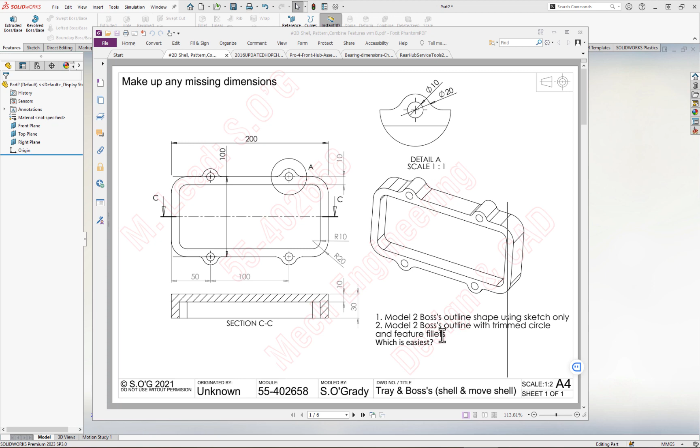external bosses. For 2 of them we're going to stay just inside the sketch - model the boss outline shape using sketch only, then use an extrude command or extrude feature to create them in 3D. Then for the other 2 we're going to model the outline with a trimmed circle and add some fillets in as features. The question is which is easiest or which is quickest possibly.

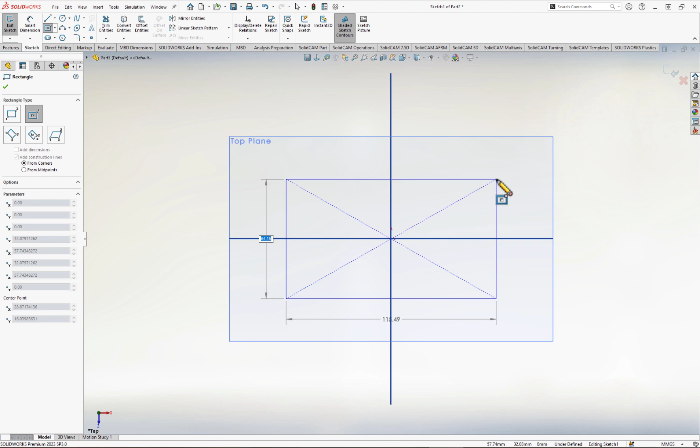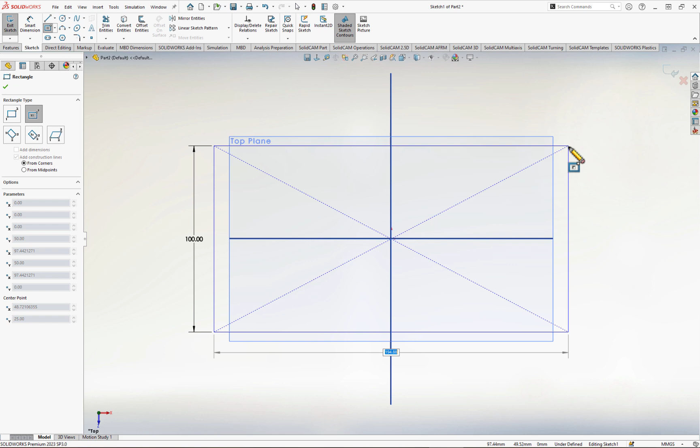So the first thing we're going to do is just create a simple box shape. I'm going to sketch on the top plane using the center point rectangle. In this case, do we have a height? I don't think there's actually a height for the box listed on the tutorial, but it does say at the bottom of the sheet any dimensions you can't see listed, just make them up so your model appears roughly the same. So I'm going to set the height to 100 because that seems about the right scale, and the length on the PDF is actually listed.

So I've got a rough box shape there, so I'm just going to extrude that using the extrude feature. I have an overall height of 30 listed, so we can accept that.

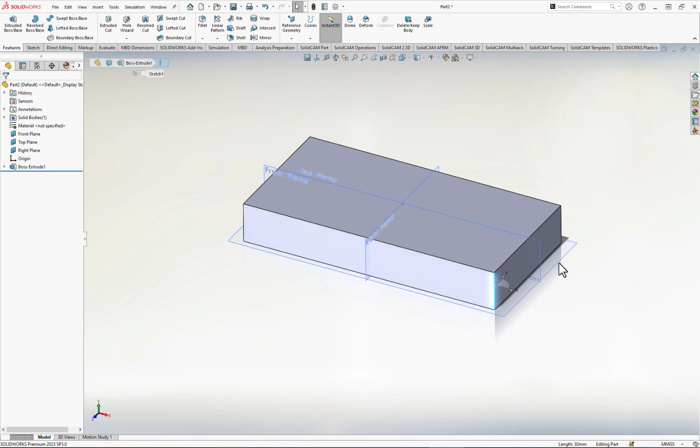And then I'm going to put some fillet features on the outside edges, the vertical edges. These fillets on the drawing are 20mm, so I'll change that to 20mm, and then select the other edges. Notice you can pick the edges through the part itself, so that's quite useful - it saves you having to rotate the part too many times to actually view the edge you want.

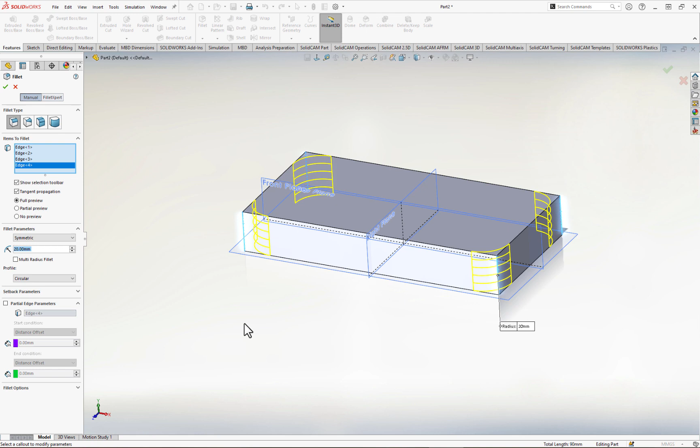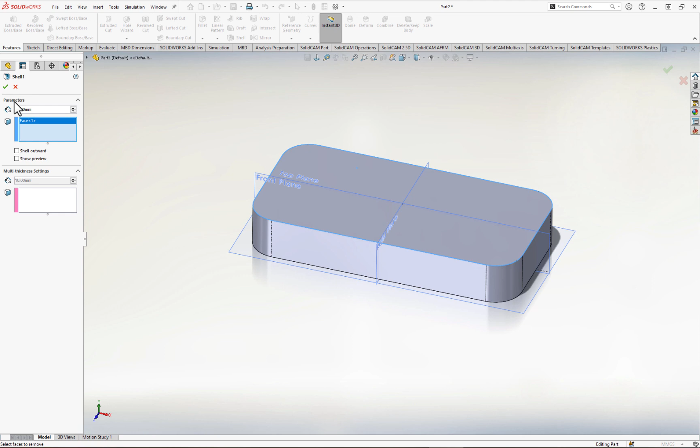So that's the 20mm fillets put on. This box has a wall thickness of 10mm, so I can conveniently use the shell command and set the wall thickness - the default wall thickness is 10mm, so that's quite useful. Then I just have to click on any of the faces I want to get rid of - in our case it's this top face - and if I want a preview of that I can switch preview on. It seems about right, but it's as easy really just to click the green tick and see what the effect of that is.

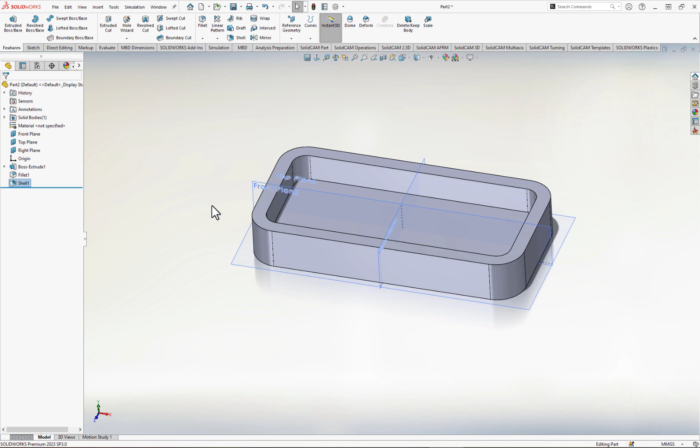So that's the basic box shape. Now let's come to creating those little protrusions, those little bosses. I'm going to sketch on this top face, and what I'm going to do is - let's have a little think.

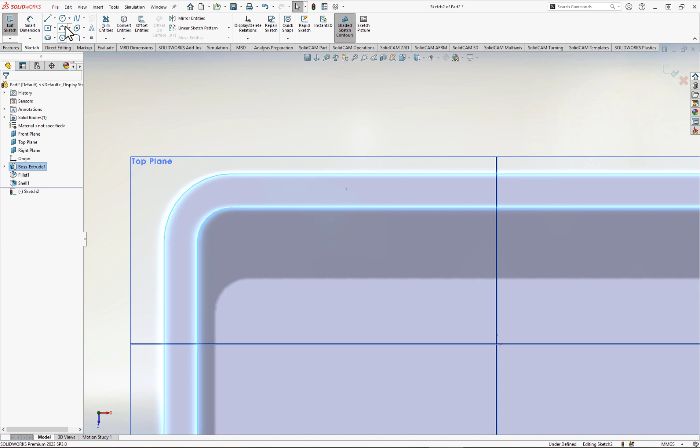Let's use the 3-point arc tool. If you haven't got the 3-point arc tool visible, you can click on the drop down and make it visible. I'm just going to manually sketch some arcs that are approximately the shapes I require - something like this. Then I'm going to use some relations to actually lock those into place. So 3 arcs approximately like that.

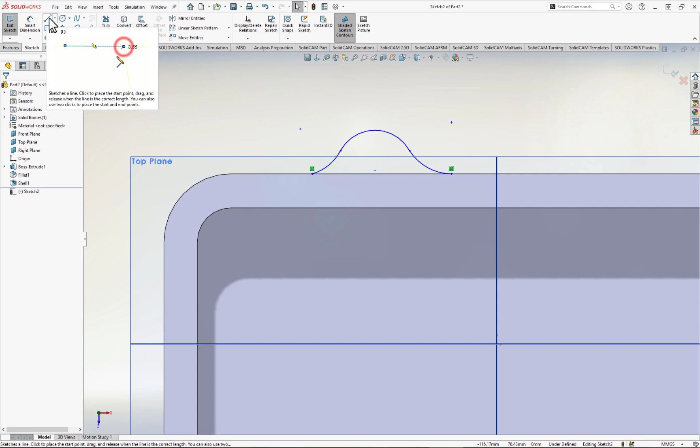Then I want to create some solid geometry when I eventually use this sketch to create a feature. So I'm going to have to create a closed boundary by putting a straight line between the 2 lower edges there, and then I'm going to put some tangent relations between the ends of these arcs. I'll click on this arc first, then hold down Control and click on this one, make those 2 tangent to each other, then do the same thing with this arc and this one - make those 2 tangent to each other, so they run into each other nice and smoothly. That's essentially the non-technical way of describing what tangency is.

And then I also want to make this arc tangent to this box edge - same thing there. And then I want to make this arc... now I've accidentally selected the exact midpoint of that arc, so I'm just going to click in some empty space to deselect that - that isn't what I want. I just want to click on the arc itself, not its midpoint.

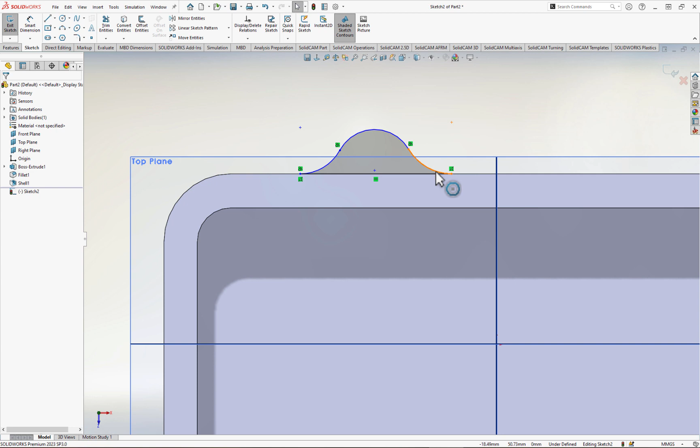So click on the arc, hold down Control, click on the edge of the box, tangent. So those are all the relations that I want there.

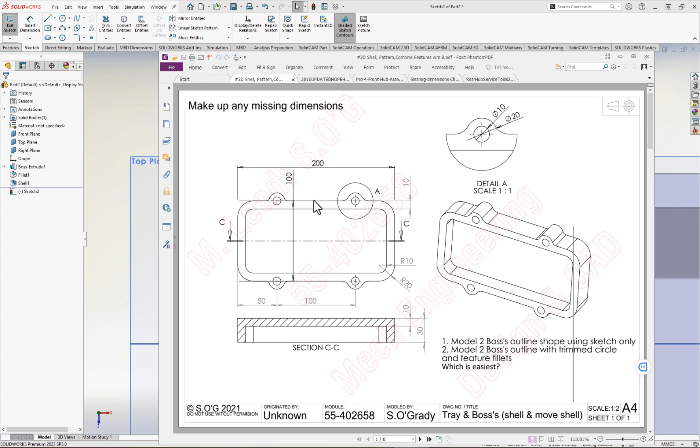What I'm also going to do is, looking at the drawing, if I bring the drawing back slightly, it appears as if what's implied here is the center point of these holes is coincident with that horizontal edge of the box. So I'm going to put that in as a relation. I can just click and drag the center point of this middle arc and let it lock itself onto the edge of the box like that, and it should put that coincident relation between the center point and the edge of the box.

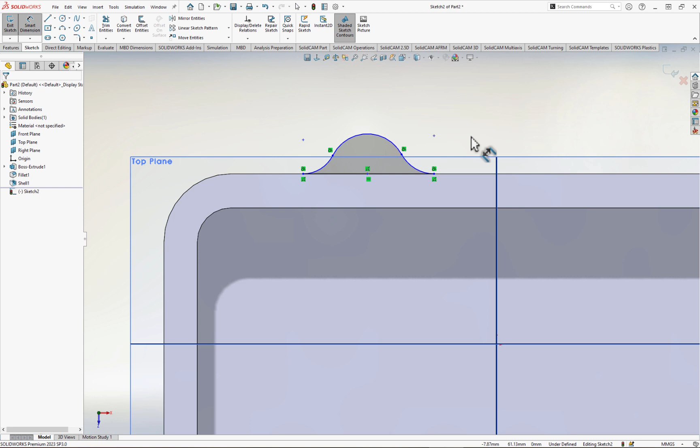So that's okay. I'll put some smart dimensions on these bosses now. So what have we got? We've got a 20mm radius for this, I believe. So let's put that on. It may pull and stretch my sketch out of shape, but no, it seems okay.

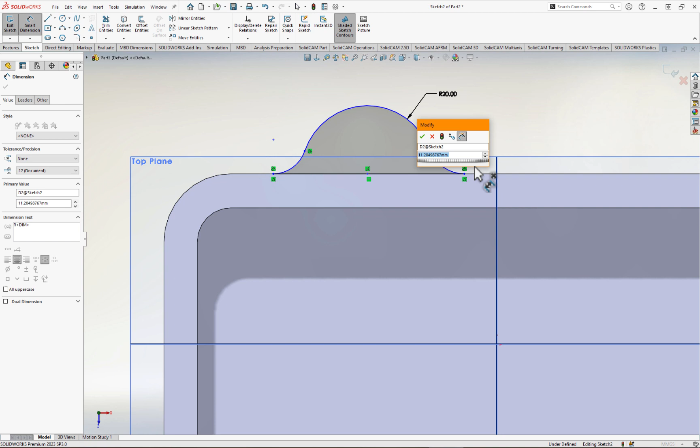And what are the fillets? I'm not sure the fillets are actually listed, so let's estimate what these fillets are likely to be. I suspect they're equal in size to this dimension, so let's see if that works. Yeah, that seems to work.

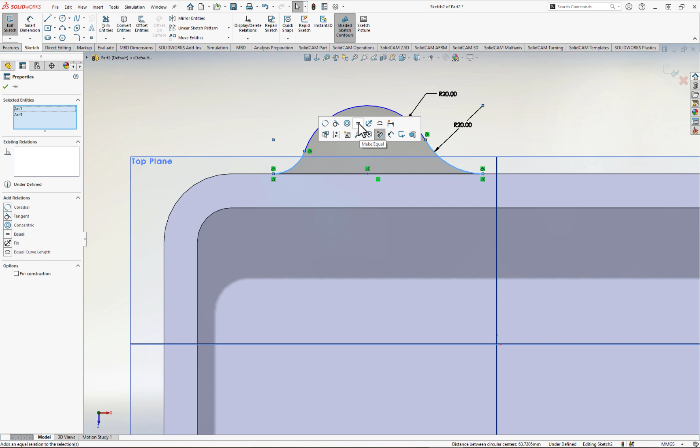And I'm only going to put that 20mm on one of these curves, because then I'm going to click on that curve, hold down Control, click on that curve, and tell the system I want to make them equal in size. So I only have to worry about modifying one dimension if I want to come back in and change these.

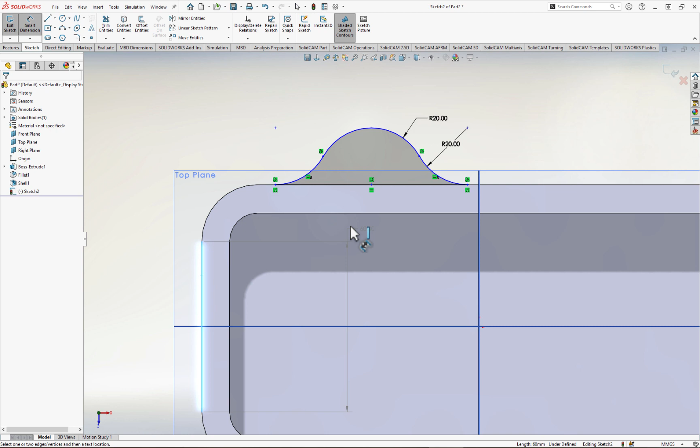So how are these positioned horizontally? I believe they're 50mm in from this edge to that center point, like that. So 50mm in. Now that doesn't look right.

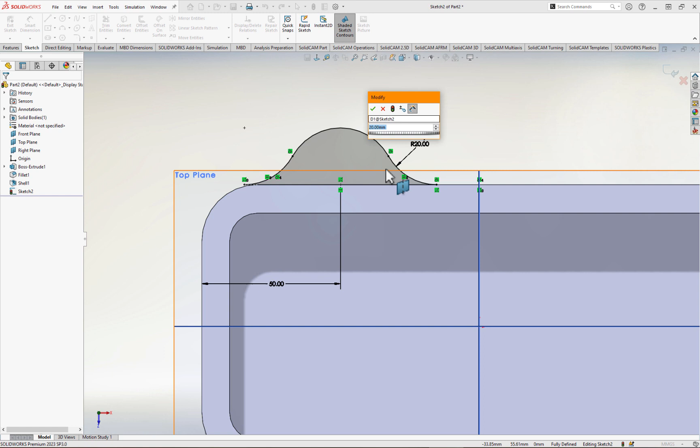That's because I've put the radius twice as big as it should be, because on the drawing it's listed as a diameter. So clearly that radius should be 10, and so should that one as well. 10. Yeah, that looks more like the drawing.

So that's my kind of rough shape that I want to add onto this box. That's the shape of the little lug or little boss that protrudes out. Now obviously I have more work to do because it has a hole cut through the center, but I'm going to do that as a separate feature.

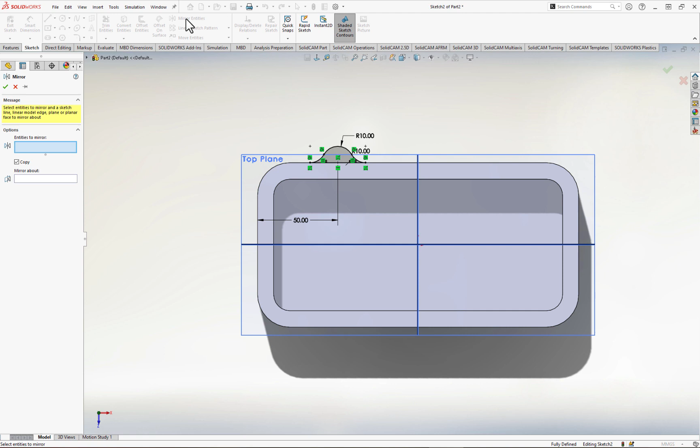So what I can do is use the mirror command within this sketch and just drag a selection rectangle over everything I've just sketched. It all shows up in that box. Go down to this mirror about box and activate it by clicking, then mirror about that plane there, and accept that. So I get a mirrored copy over here.

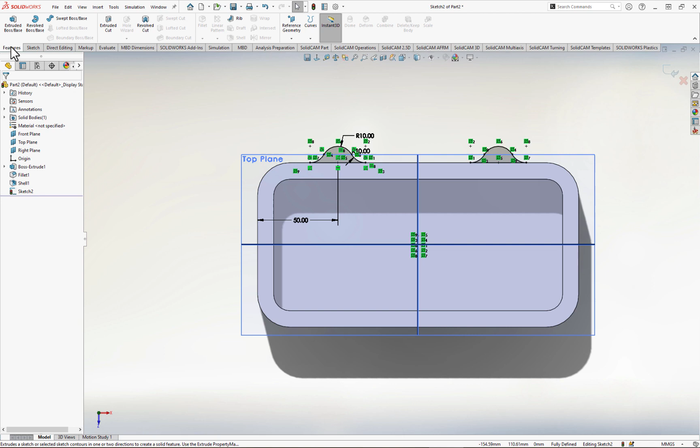And then with these two closed boundaries, I'm going to go into features and tell the system I want to use these closed boundaries to create an extruded boss. It's going in the wrong direction currently, so I'm going to flip the direction there.

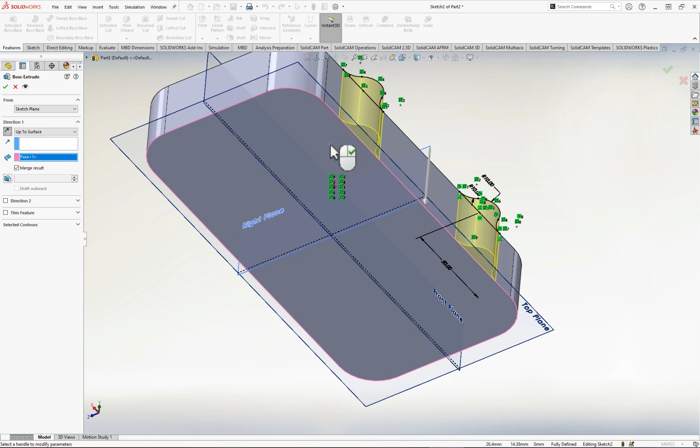30mm happens to be the correct depth or extrude value, but it's probably safer to switch that from being a blind value to up to surface, and then we can just click on the bottom surface of the box itself. That way, if the height of the box changes in the future, these bosses will follow that change. I won't have to come in and edit another value - these bosses will just extrude however deep the box is. So that seems a bit more sensible.

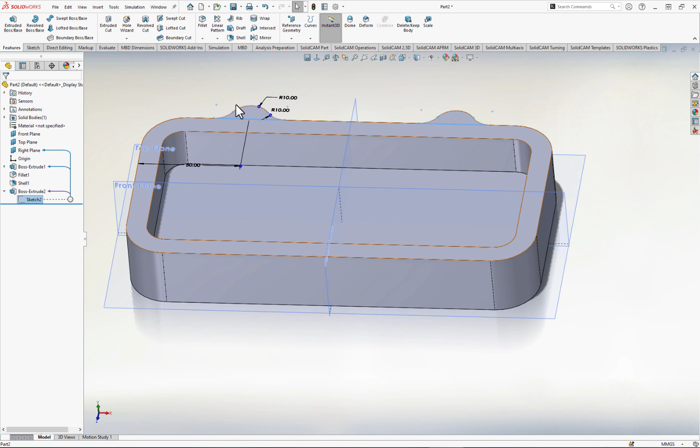So that was the first method on the PDF, where we sketched the shape in its entirety that we required adding on to the side face of the box. We did use a slight labour saving tool there because we used the mirror command once we'd sketched it over here, so we didn't have to sketch it a second time. But it was a little bit long-winded, setting up those arcs and putting the tangencies in there.

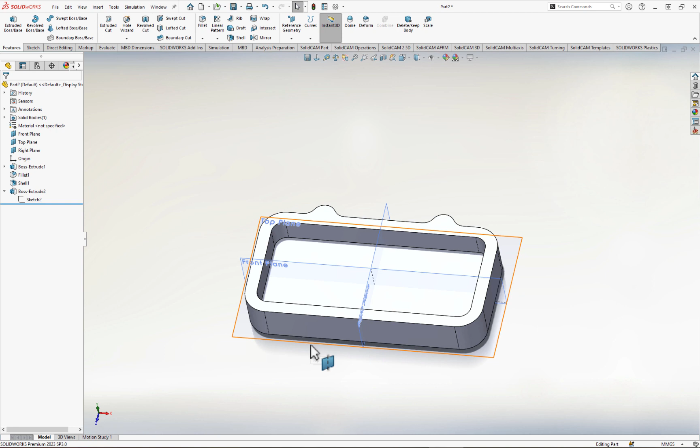So let's look at a slightly different way of achieving exactly the same thing. I'm going to begin the same, sketching on this top face. But this time, all I'm going to do is get my circular sketch tool and sketch a circle that has its center point attached to the side of the box there. Then I'm going to set the diameter of that circle to whatever I need it to be.

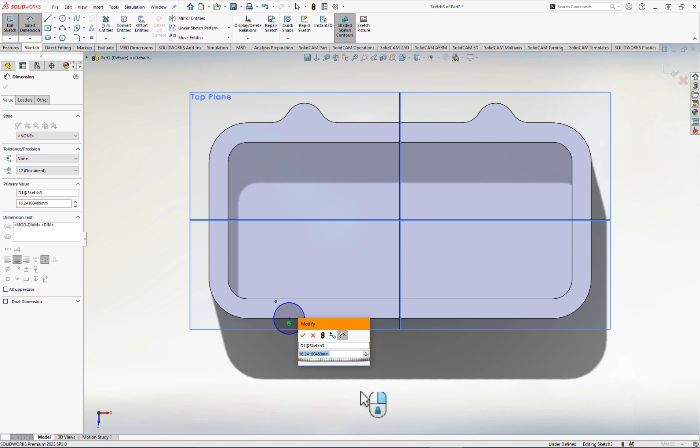So if you remember, the diameter should be 20, the radius obviously is 10. And then get my smart dimension and just say from there to the center of the circle should be 50.

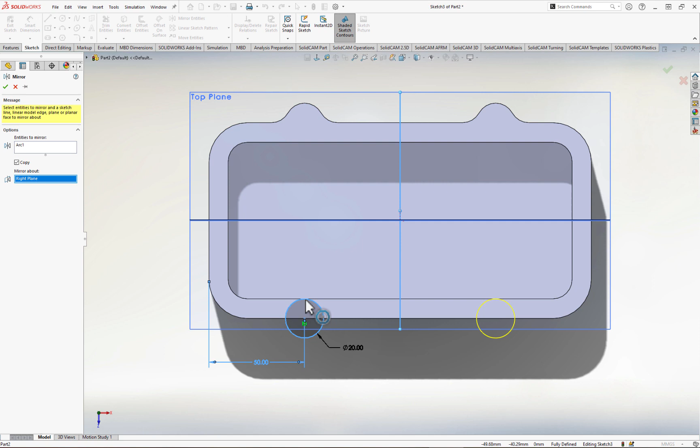I'm going to use the mirror command again, selecting the entirety of that circle, mirroring about that plane. This may or may not work. The reason I'm calling attention to this is that the edge of that circle is coincident with that flat face on the inside of the box, and sometimes the system doesn't like that. But we'll progress, and we can always come back and fix that if need be.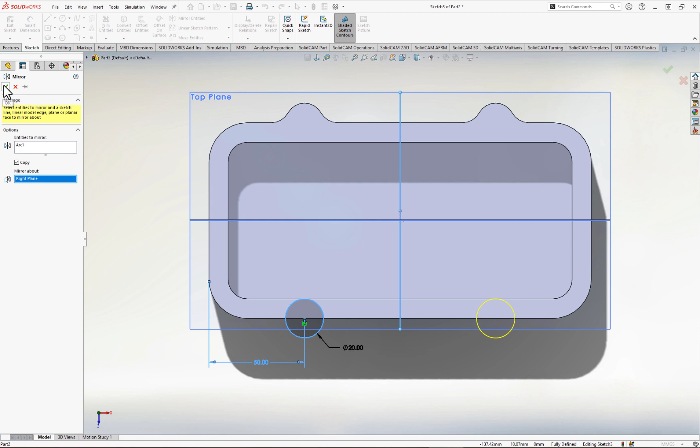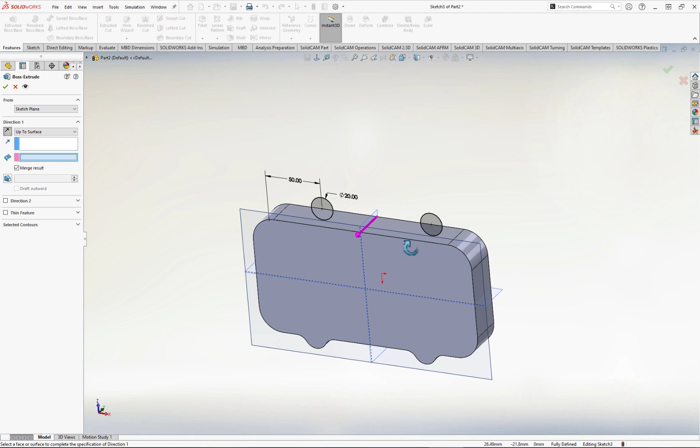We can put a straight line in there and use the trim command. But let's see—okay, extruded boss/base. This setting I set previously, up to surface, is still set here, so it's just waiting for me to click on a surface. I'm going to click on... I picked the front plane by accident there, it's an easy thing to do. Yeah, so I've picked that bottom surface of the box, accept that feature.

Everything seems okay. Those circles aren't protruding through onto this inside face of the box, so that's fine.

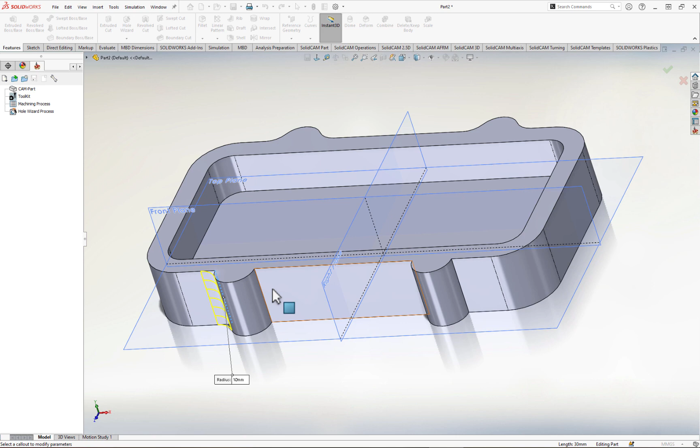That's not quite finished, because what I would do now is use the fillet command. There's the fillet command, but it's far easier and quicker, rather than going to the top of the screen and opening that command, to just click on an edge you want to apply a fillet to, and the fillet command pops up there. So let's apply our fillets. These were 10 millimeters, and I can just click on any edges I want to apply that 10 millimeter fillet to.

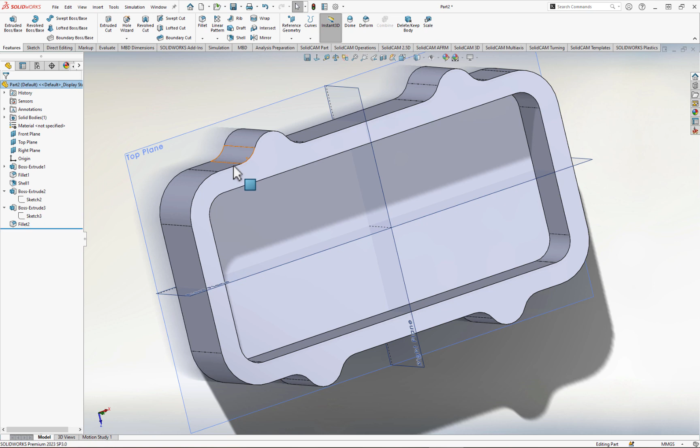My system seems to have jumped into another menu there. So yeah, two alternative methods of achieving broadly the same thing, or exactly the same thing there. If I had to give advice, I'd say broadly I prefer the second method. For any fillet features, all things being equal, it tends to be more wise to apply fillet features using the fillet tool. That's not always the case, but more often than not it's advisable to apply fillets to a part using the fillet tool rather than any sketch tools. So try to strip out the fillets when creating your sketches, and add them in after you've created a feature from that sketch using the fillet tool. That's the broad advice—it doesn't always hold true, but more often than not.

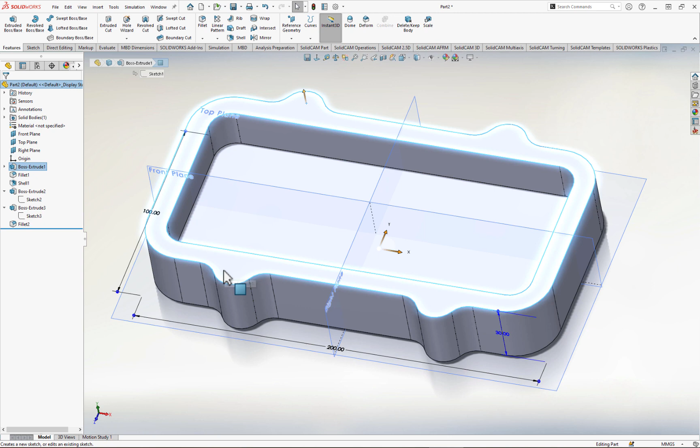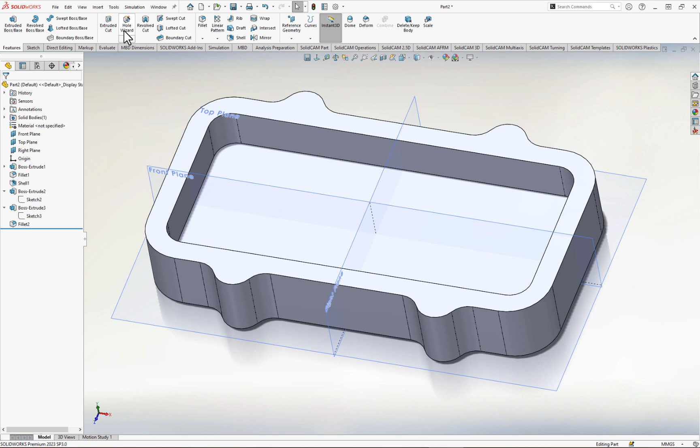So let's put these hole features in. We could quite easily sketch on this top face, sketch 4 circles where we need them, and use an extrude cut to cut that material away. Or we could use the hole wizard tool. Given that these are plain holes, just kind of simple drilled holes possibly, there's not a huge amount of advantage to using the hole wizard tool. So let's just do a simple extruded cut.

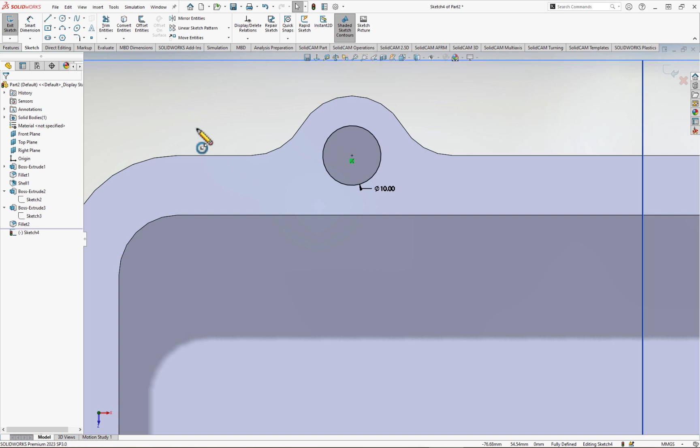So I'm going to get my circle tool. I'm going to hover over that edge until the center point appears, because I want to lock this circle onto the center point that's already there. I'm just glancing over to see what diameter these should be—10 mil—and then if I press escape, yeah, that circle's locked in position and its size is defined as well. Then I could use the mirror command again, mirror that about that plane there, and then use the mirror command again to mirror both of these about that plane there.

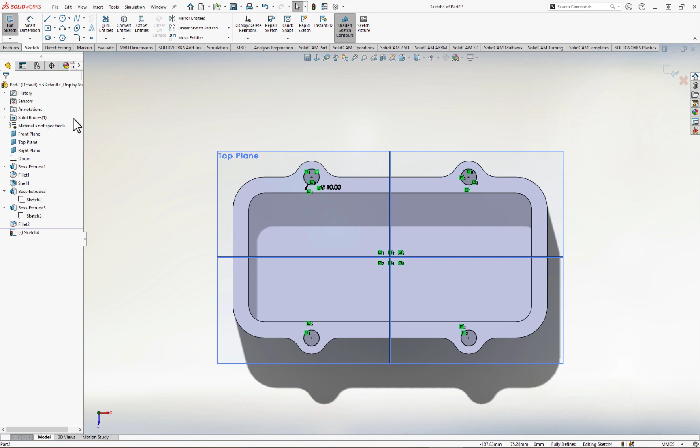And then go to Feature, Extruded Cut. I think this time, rather than a blind value or up to surface, I'm just going to say through all, and it will cut through the whole of the box. So that's broadly one way you could use to model up the part shown on that PDF.

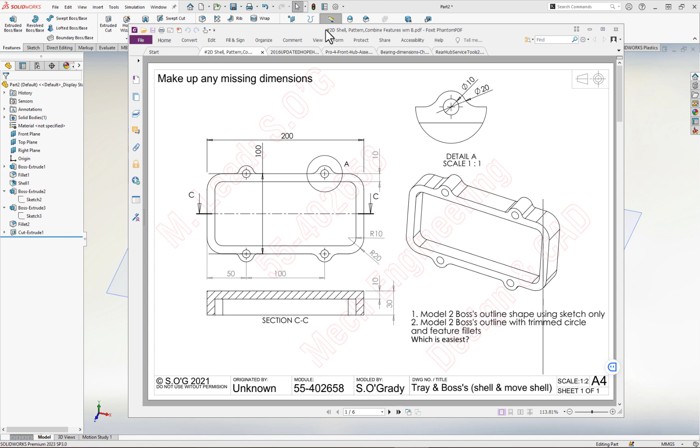Often there are multiple methods or multiple routes to arrive at the same 3D geometry for your part, and which one you choose will always have pros and cons in terms of making your parts easier or harder to edit in the future, or speeding up or slowing down your workflow. But yeah, two methods there that you could possibly use to create a part such as that.